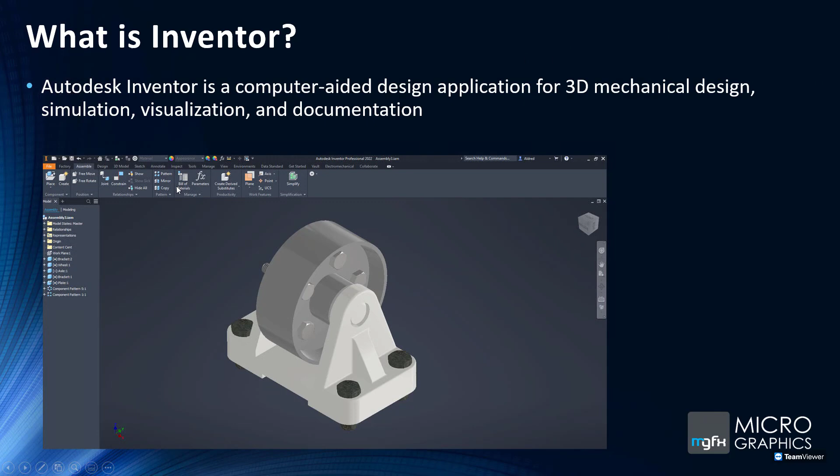As you can see over here, the interface is a little bit different. I'm just going to go up to Inventor. The interface is a little bit different over here, but as you can see, you've kind of got that ribbon at the top, and then you'll see over here, you've got your components and parts on the left-hand side.

Now let's see, what can Fusion 360 do that Inventor can do? I've actually just duplicated that list over here because it can also do your sketch creation, your part modeling, solid or surface, your sheet metal, your assembly creation, your 2D drawing creation, visualization, presentation, and it's also parametric. I did this because fundamentally Fusion and Inventor can do the same things. It's just that sometimes Fusion is stronger on some components and weaker in some other components compared to Inventor, and we will be talking about that as we go.

Okay, so now you've come up to it. You've seen they both do the same thing. Now, which one do you take? The kind of questions that you've got to ask yourself is, what do you do?

Now, are you going to be doing large production type work? Are you working in a factory where there's lines and lines of conveyors where components have to go from one component to the other? Do you have like 10 CNC machines in your place? Do you have 30 designers? Do these designers have to interact with each other? Do these designers have to interact with external consultants?

Are you just doing R&D? Maybe in that big environment that you're working on, you might be the guy sitting in the back room doing R&D. So think about that, with the R&D stuff, do you need Inventor or do you need Fusion 360? Are you a one-man band? Are you a hobbyist? Are you someone who's retired who wants to kind of tinker with something, maybe make it a little bit of a hobby, and then actually even go into production because you want to do maybe a little bit of work on the side?

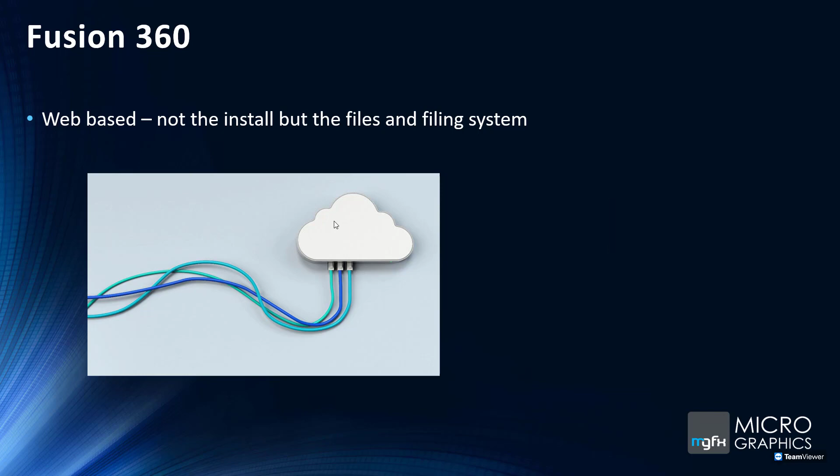With Fusion 360, because it is in the cloud, I'm able to give access to other people anywhere in the world, just using their email address. And that access is either read, write, download, or modify - so they can do something with the models, or they cannot.

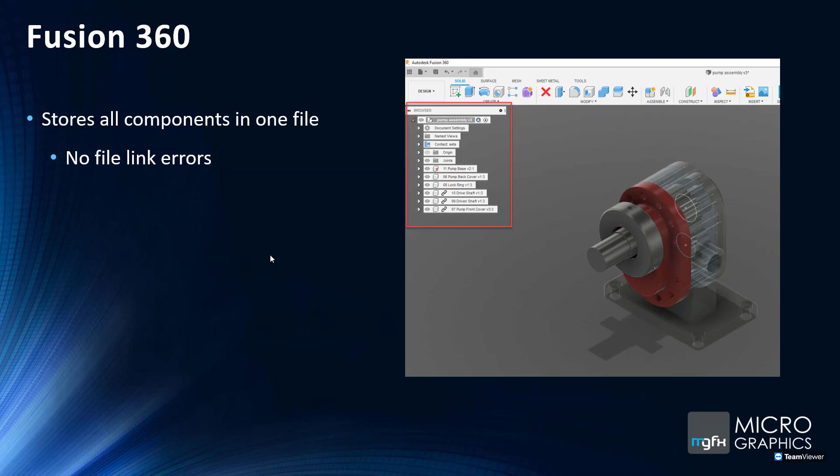So if I had to remove one of those part files and try to open up the assembly again, it would give an error and say I cannot find that file. Whereas in Fusion 360, everything sits in one file, so you won't have those file link errors.

All the design environments are accessible from within that file. As we'll see with Inventor later, Inventor's got different types of files - part file, assembly file, drawing file - whereas Fusion 360 has one file, and in that file you've got different environments: design environment, generative design environment, render environment, animation environment, simulation environment, manufacturing environment, and drawing environment.

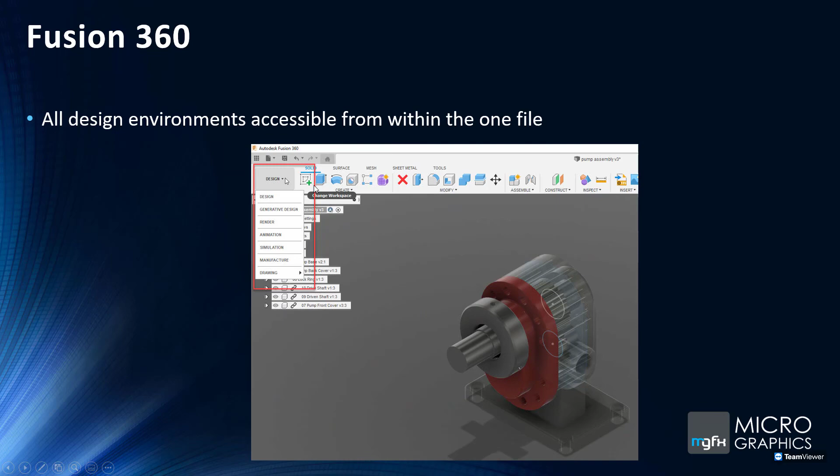As you click on each of those different environments or workspaces, you'll see that the top here - solid, surface, mesh, sheet metal tool - will change in accordance to what you're actually working on.

Just on the web-based file management - we've spoken about this a bit. You can give permission to anyone from any location all around the globe, and this allows you to be very flexible in how we're working. At the moment, with the whole COVID situation, people are working from home. People need to access the data, but they also need to give access to their data to other people. So this is a very great way of working.

Not to say you can't do the same thing with Inventor, but this is set up straight out the box to work in this kind of environment. The nice thing about this web-based file management is there are two different ways to access it. If you've got the Fusion 360 software, you get a Fusion Team license and you're able to access all your designs through there. Or, if you're not going to be doing any design work, you can get a Fusion Team license, which is much cheaper than Fusion 360, just to access the data you're working with.

So that's a little bit about Fusion and the pros and cons of that. Now let's take a look at Inventor. As I said, if budget is an issue, Inventor might not be the thing for you straight out the box because it is comparatively higher in price than Fusion 360. There are two different types of software packages you can buy to get Inventor - we'll go through that a little later - but basically it is a lot more expensive than Fusion 360.

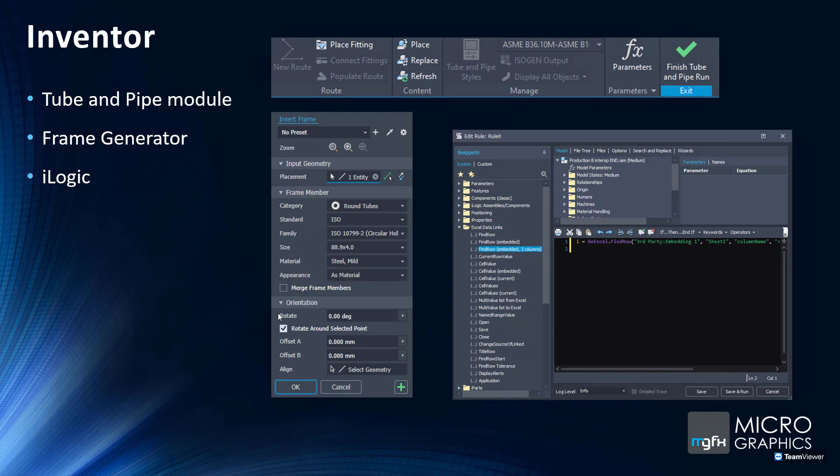Now with these two, so if you've got your tube and pipe module, your frame generator, you'll also get the content center. McMaster-Carr, I think, is a website that Fusion 360 has which allows you to download your library components. It's very nice to have, it's got all these hardware components, but all the metadata is populated by whoever created that website. Your content center is great, it also does that.

It's got your fasteners, it's got all your hardware, shaft parts, your bearings, things like that, structural shapes, your U-channels, rectangular tubes, circular tubes, square tubes, your tube and pipe, T's, bends, valves, etc. So it's got all of that in there, but you can also go and modify this stuff so that you've got your own metadata in it, your own descriptions, pull out your own part numbers, pull out your own stock number.

And that's all sitting locally, which you can share with your extended team. I think this content center works a little bit better, I like it much better than the McMaster-Carr, but each to their own. There is something available for you in Fusion 360 as it is in Inventor as well. But with this content center, the frame generator and the tube and pipe module basically rely on that content center.

Okay, so another thing is Inventor saves everything locally, either in your Windows filing system, or in the Autodesk Vault, which is the data management system that you get with Inventor. So if you buy Inventor or AutoCAD, you actually get Autodesk Vault Basic, which has got basic file management properties to it. You also get the Vault Workgroup and you get the Vault Professional as well.

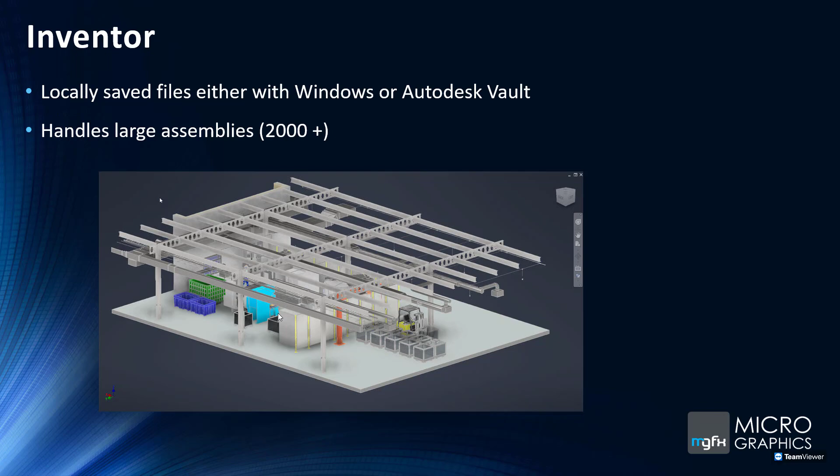So unfortunately, in what I've experienced, if you have large assemblies, you have to go Inventor. There's no question about it. Fusion 360 is not the software package for you.

So which is better? Just as I said, I don't think anything is better. But in certain criteria that you might have, I would say in large productions, definitely Inventor. And these are kind of the things that I have experienced. And definitely if you have to pull out a bill of materials, go Inventor.

And the bill of materials that you can pull out in your 2D for Fusion 360 is not that great. I think there are plugins, but those are additional plugins that you have to buy. So I haven't really worked with it, but I just know that straight out the box, if you need a bill of materials, go Inventor.

If you're a small shop or do R&D, Fusion 360 is probably better for you, with your bespoke design. Once again, it's not saying that you can't use Inventor for it, but if you're going to be doing one-off designs and send it to the shop to be made for a client, then I'd say go Fusion 360.

So those are my criteria for which one will you go.

Look, there are lots of other different criteria that you can take a look at, and that's why I always say when looking at this kind of high-end software that we work with every day, talk to your reseller. Come talk to us. We've got lots of experienced guys. Tell us what you do. Tell us what your workflows are. Tell us how you get around your day, how you get around your designs, how you like to save everything.

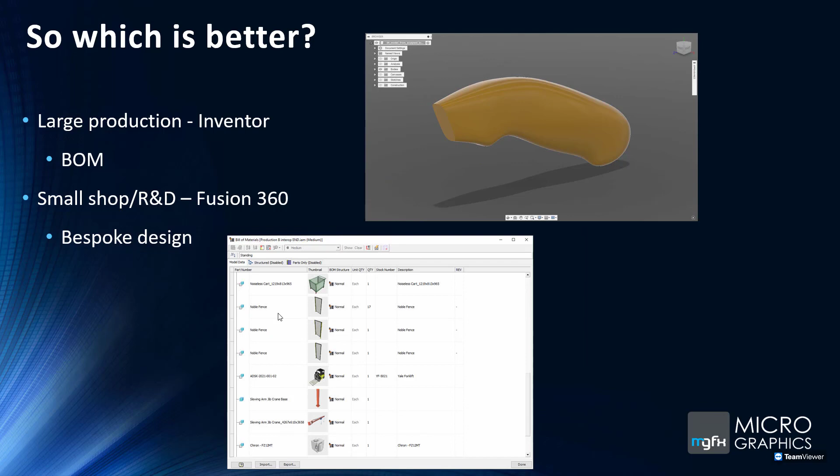And it might not just be that it's just Inventor. It might not be it's just Fusion 360. It might be a combination of both. So you might have 10 designers and 2 of them might need Fusion 360, and then 8 of them will be working on Inventor because the guys using Fusion 360 might not need all that functionality from Inventor.

Just before we go on to comparing the two and collaborating with them, this is how you can purchase Fusion 360 or Inventor. So you can either purchase Fusion 360 on its own, or purchase Inventor on its own as well - those are two different packages. Or you can purchase a product design and manufacturing collection, which will then include both Inventor and Fusion 360. So if you're working on Inventor and you need to do something in Fusion 360, there is a nice little link between the two.

You do your design in Inventor, you pop over to Fusion 360, you create whatever you need to do there, bring it back into Inventor, and you continue design, and everyone's happy. So, collaborating for the best outcome. So, how do we collaborate between the two?

Autodesk created this technology called AnyCAD. AnyCAD works where you've created a model in another software package, because Autodesk realizes not everyone's just going to use Inventor. We know that other people might use SolidWorks, SolidEdge, or CATIA. So they've created this technology where you're able to import a file and keep a live link to the original software.

With Inventor and Fusion 360, Inventor can go into Fusion 360 and Fusion 360 can go into Inventor. If I'm in Fusion 360 with an AnyCAD reference model from Inventor and the Inventor model changes, it'll update in Fusion 360. If I've created any geometry dependent on that Inventor geometry, it will automatically update. Same thing going the other way: take the Fusion 360 file, go into Inventor, work off it, Fusion 360 file changes, go back into Inventor, whatever you've created which is dependent on that Fusion 360 geometry will change.

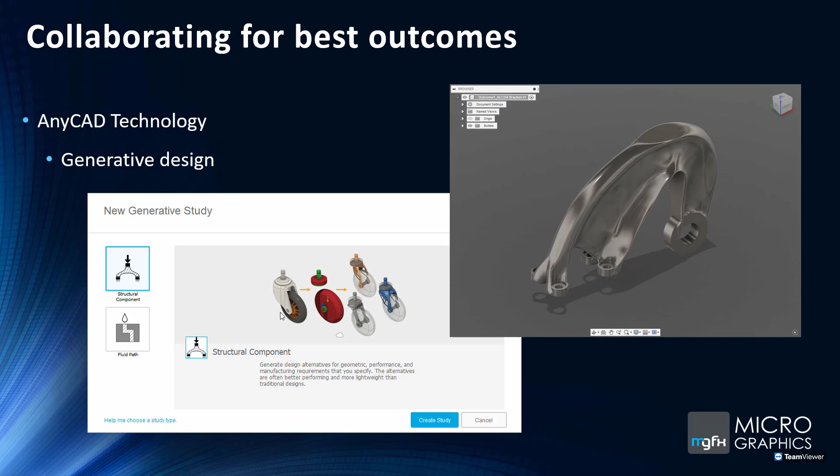So you will find that, even going forward, Inventor will never have this. That's kind of how Autodesk has positioned it. You've got two fantastic pieces of software, and because one computes in the cloud, use that cloud to an advantage, but then have the link between the two so that you can use both in the best way possible.

If you've ever done PCB design - traditionally what's happened is you've had the manufacturing or mechanical engineers creating the housing or the whole component, and you've got the electrical guys creating the PCB boards or the wiring and single line diagrams. But how do we bring them together?

Fusion 360, with the use of a technology Autodesk purchased a couple of years ago called Eagle, is able to do this. So either you can create everything in Fusion 360 with your PCB design - and the nice thing is, when the board design changes, it automatically changes the 3D components sitting on the board in Fusion 360 as well. You can do that all fully inside Fusion 360, or maybe it's just the part which houses the PCB board, and you can take it back into Inventor and carry the design over there. So that's where I'd say Fusion 360 - I won't say much stronger, but it's just the only option over Inventor.

Okay, you might say Inventor's also got FEA in it. Inventor's got Nastran, which you can only get in the Product Design and Manufacturing Collection, not just with Inventor on its own. The FEA in Fusion 360 and the FEA in Nastran both work on the same solver, which is the Nastran solver.

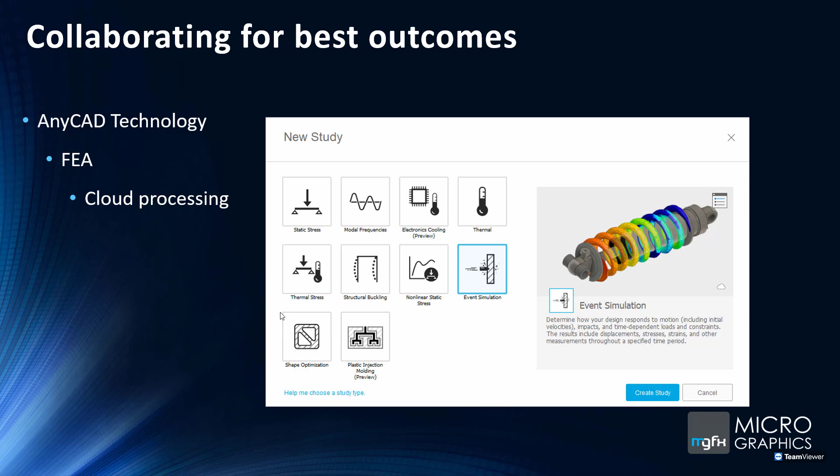So just bear that in mind - if you have a lot of processing where time is of the essence, maybe take it to Fusion 360 where it's got cloud processing. One thing to note is that cloud processing does have a charge to it, so you will be charged for those simulations.

This is something I truly believe in. Inventor has Inventor CAM, which runs on HSM technology, and Fusion 360 has it as well. So do you do CAM in Inventor or Fusion 360? I truly believe do the CAM in Fusion 360. As I look at the manufacturing modules or technologies they're putting in, Autodesk seems to be putting more effort into the CAM in Fusion 360.

You'll see that with the manufacturing extension they've got. Autodesk bought over a technology company called Delcam, and Delcam was one of the best manufacturing companies in the world. They have some very powerful stuff like PowerMill. I can see they are starting to migrate some of that technology from PowerMill and other software like FeatureCAM into Fusion 360 by way of the manufacturing extension.

This manufacturing extension is very useful because you might just need the normal CAM, and then every so often you might need the manufacturing extension. So you can just bolt on that extension for the year or whatever it is that you need it, whereas if you had to go buy something like PowerMill, it's very expensive. Here, what they're doing, you're getting the best of both worlds - a very nice, cost-effective design package with some very good CAM in it.

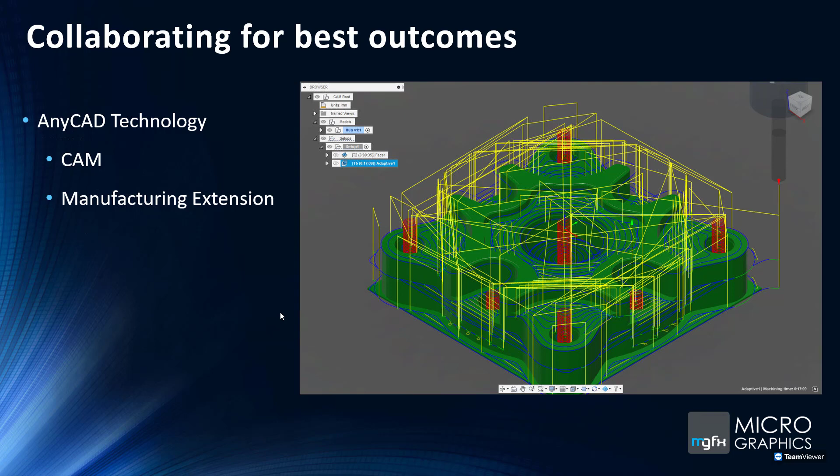And if you do need that extra really powerful manufacturing process, like steep and shallow, you're able to add on the manufacturing extension. That's something Inventor does not have. So I would say, from the CAM side, definitely use Fusion 360. Also, traditionally what happens is the guys doing the CAM, making the components on the CNC machine, don't need Inventor - they just need Fusion 360. You send them the part, they AnyCAD it in, and they create their components there.

So in summary, the way I would work between Inventor and Fusion 360: all my design work is done in Inventor. It's got things like iLogic, structural design, tube and pipe modeling and iLogic. I do all of that to make it nice and configured.

And then for Fusion 360, any of the downstream processes like CAM, very processor-intensive FEA if you have to, as well as your PCB design.